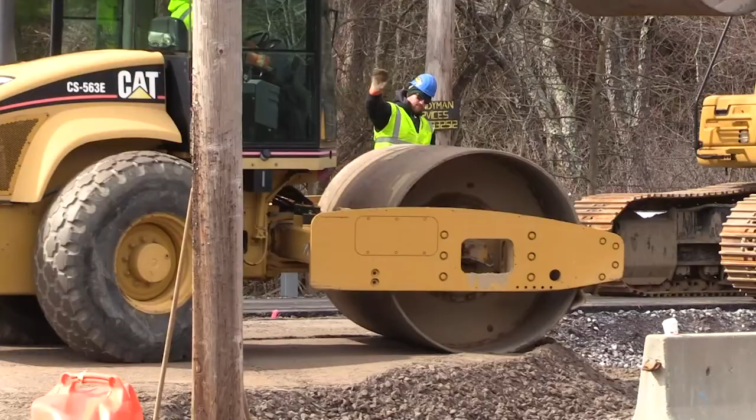Good morning, I'm Kyle Fox, Public Works Director for the town of Merrimack. Hi, I'm Diane Trippett, I'm the town clerk tax collector for the town of Merrimack. I'm Captain Matt Tarleton with the Merrimack, New Hampshire Police Department.

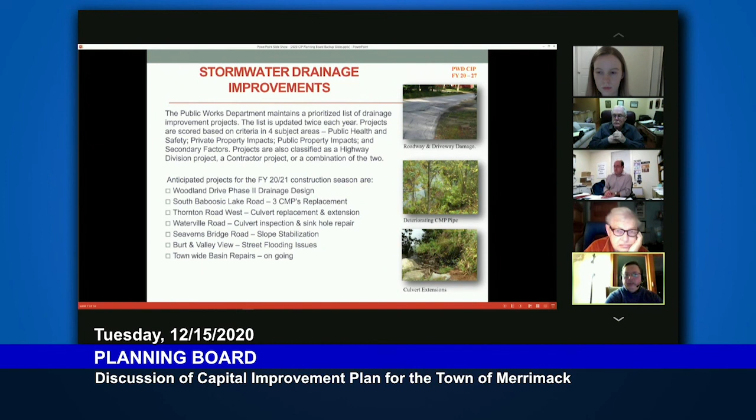Excellent, that was well explained. And I guess the overall objective of this is to protect the quality of the water in the Merrimack River and other surface waters where we may be draining water to. Exactly right. Does anybody have questions about stormwater drainage in this presentation? Thank you guys for the little primer on MS4. I think we get so used to hearing these things that we just race past them sometimes, and it doesn't hurt to give it a little bit of better explanation.

Paul, what's next? Something that's near and dear to the planning board's heart, some sidewalks. I saw this in there and I was cheering, I'm like, look at this, I can't wait to talk to Paul about this. We're going to applaud out loud when you get done explaining this one.

So right now, as you know, the council has set aside $200,000 in this current year budget. They approved the project on Woodbury Street, connecting the high school to DW Highway. Before it snowed, we had some surveying work done out there. So we're starting the plan to get that sidewalk in on Woodbury Street. We hopefully will have that during the next construction season, so spring, summer of 2021.

The town council has made a commitment for $200,000 in the sidewalk to expand sidewalks over the next several years. So next year we're looking at areas, and I believe we have 4 or 5 projects that we put on a plan for the town. We're looking at areas such as Brunswick Road, projects that we can complete and shore up some of the sidewalks. $200,000 does not go very far if you have to buy easements, move utility poles and things of that sort. So we're really looking for some low-hanging fruit to get this project done, but we really want visibility of the sidewalks in the center of town and around DW Highway. So that's what we're looking at in our sidewalk master plan moving forward.

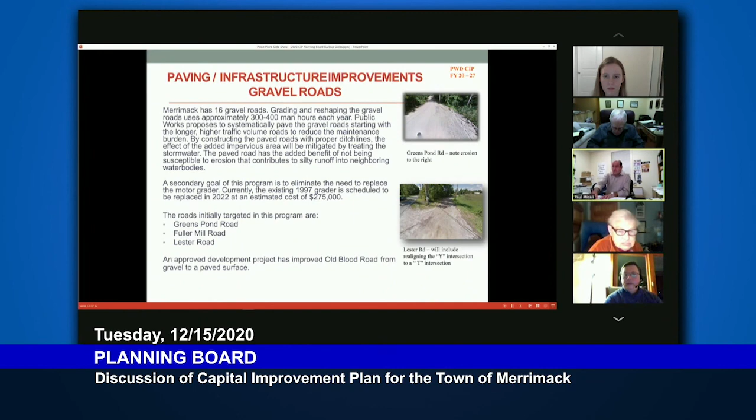Yes, the next one is one of our main ones, we talk about it all the time - DW Highway. We paved it a couple of years ago. It's approximately 4.9 miles, and we do it in sections. Last year we really took on an undertaking for some crack sealing and things of that sort.

We're looking at 23, 24, 25, 26 to go through, and instead of doing a major wear course on it, we're just hitting the areas where we feel we can rehabilitate that section of road before conditions get so bad that we have to do a full rehabilitation. This is all part of our infrastructure investment in our roads, and DW is one of the major thoroughfares through our town. So we're looking at things of that sort to keep the road in good shape so that it isn't as costly when we do go to repave it.

Okay, questions about that? Do you think this work will make the road good enough for when we have to face the inevitable increase in traffic while they do the Everett Turnpike?

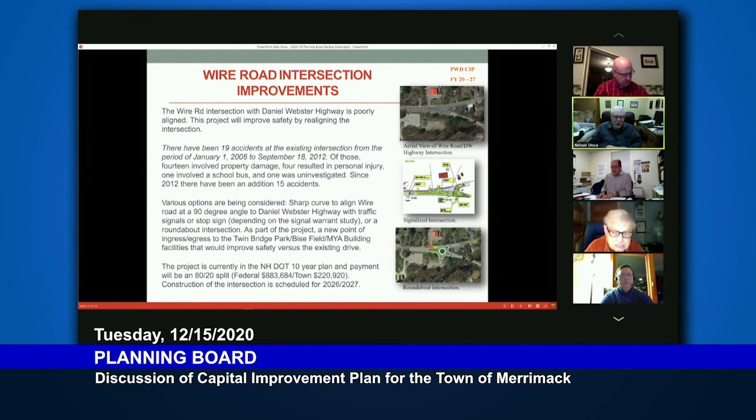Yeah, okay, that's what I was getting at. Thank you, Paul. Any other comments or questions about that one? Okay, no, let's go ahead then.

Turkey Hill Road intersection improvements. That's been before the council since September. I believe it's been through engineering and design, and Kyle's group is going to bring it back in front of the council, maybe January or February, to get final approval and go ahead, with a roundabout planned. They'll finalize some of the design and bring it forward for the council to see.

Hopefully construction is anticipated in 2021, spring or summer season, to do construction on that road. Thank you, Paul.

What's the cost estimate on that one? It's not shown on my spreadsheet. Yeah, the council had that in the budget last year, give me a sec. So the funds have already been allocated for this? Yes. Awesome. About $300,000 has been allocated for that realignment.

I think it was a little bit more, around 350 to 375 thousand that the council approved for that project. So, yeah, the funds— and if I can jump in, Paul. Yeah go ahead, Kyle, you're back. Yeah, I've been here.

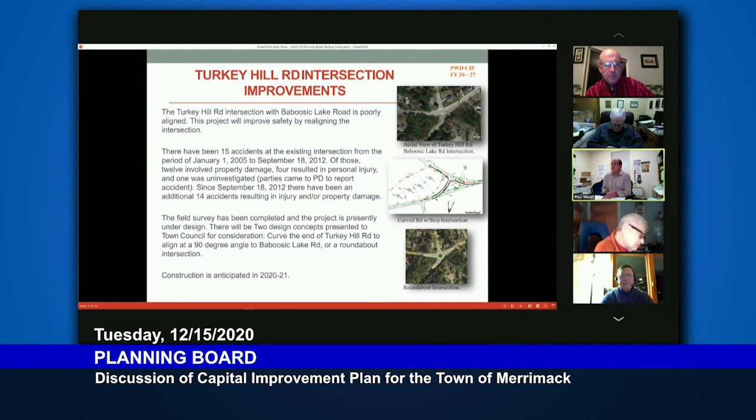Good point. Yes, anyway, thank you for the presentation on that. Any other comments on that one? Thank you, Kyle. Paul, lead us on.

All right, Merrimack River boat ramp access improvements. As you know, we own a parcel down by Thornton's Ferry off of Griffin Street where we have a boat access ramp. We also own another property that was conservation purchased. So we're looking at potentially improving the access to the Merrimack River for a boat launch.

The good thing is there's actually good and bad here. Fish and Game has money to help us with the project — that's the good part. Another good part is Nashua, near Greeley Park, has put in a boat launch as well onto the Merrimack, so bigger boats can launch down at Greeley Park.

The bad part is that to get to our boat ramp, you have to go underneath the railroad trestle, and that kind of limits the size of the boats and the size of the trucks that can get through there to drop off a boat. So those are things that the council is looking at. The other thing the council's looking at is that mostly every spring that road floods, so we got to look at building a road that is feasible and easily repaired, because we cannot get our heavy equipment down there to repair the roads. Once again, we got to get underneath that train trestle, and it's a very low train trestle from the B&M Railroad.

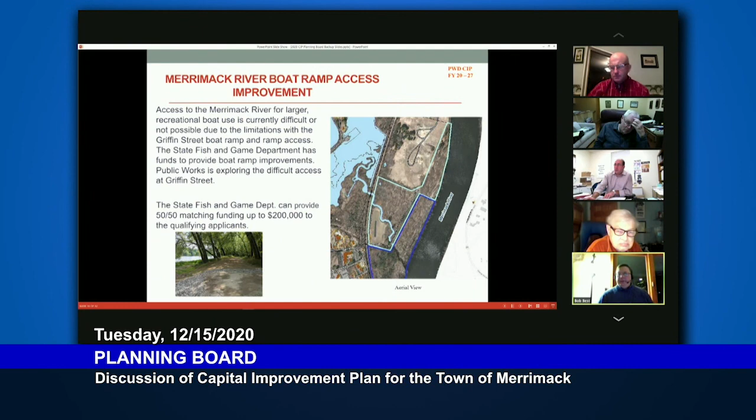I'm going to skip to the sidewalk improvement. Once again, we already talked about that, but we are looking at some TAP grants over the next every 2 years to help us in that process, as well as the council putting their $200,000. And what we also talked about, Bob, is the potential, if the council sees fit, of having that sidewalk fund, so to speak, to help with these projects.

That's what we're looking at with the TAP grants, and Nelson's very much involved in that TAP grant and issuing those TAP grants, helping us going forward. Don't I wish?

We're looking at a sewer extension project based on our master plan, in the McQuestion Mayflower area of town, up by where we just had the developer fix the sewer coming off O'Gara Drive, which will make this project a lot easier for the town to connect. We don't have to go up and around through that neighborhood that cuts through on McQuestion through Baboosic Lake Road there. This project will be able to connect into that sewer infrastructure that was replaced and repaired. So we're looking at that in the 22-23 year for some sewer improvements in that area.

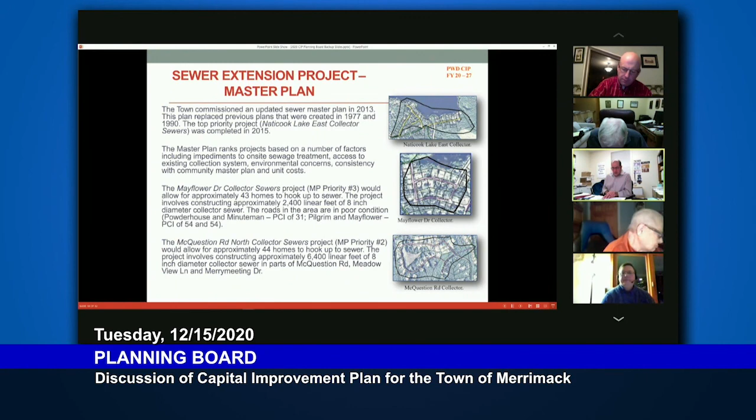The other one is Depot Street - Councilor Boyd hit on that about the canoe launch. It kind of came to the point where you can't really get anything in there because the launch is disintegrating or being washed away with some of the water and floods we had. So we're looking at doing some repairs to that this year in this construction season.

And then the next big one is a placeholder - this is a little bit out of line, but the stabilization of the bank at Seaverns Bridge on Amherst Road there. We need to stabilize that slope because the way it's going right now, it's washing into the river over there. So we're looking to get some stabilization done for that project.

There's an existing canoe launch, but there's potential to go across the road onto a property the conservation commission owns, to have a better area for a parking lot and canoe launch. But that's further down the road. This project is just to stabilize this banking, so number one, we don't lose the road, and number two, it's safe for people to put a canoe or kayak in the Souhegan River at that portion.

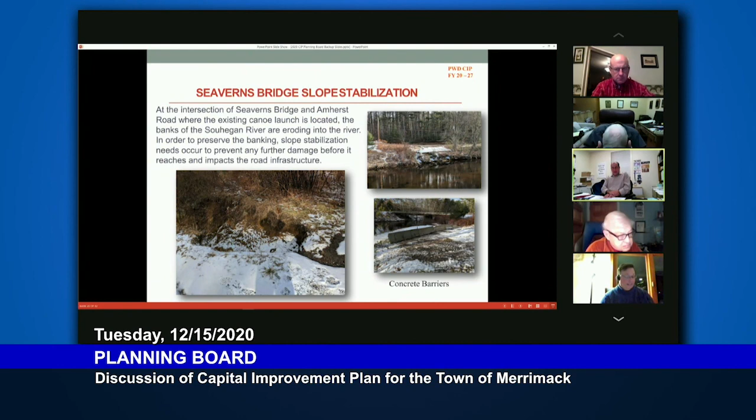This next one is near and dear to all your hearts on the planning board: the master plan, which is coming due in '24 and '25. And then the last item is athletic fields development, because of the need for athletic fields in this town—we're looking at several different opportunities for that.

I know I went through those things pretty quickly—a lot of placeholders, keeping things on the radar, so to speak, so they don't fall out of people's minds.

That makes sense. Many of these are so far out in the future that we've got plenty of time to talk about them, and any questions or answers we'd have at this point would be subject to change anyway. So I'm glad to have this brief discussion. But let me recognize—does anybody have any questions on any of the ones Paul raced through?

Nelson. Yeah, just one—there's one he skipped over completely, and I wanted to make everybody aware of it: the pedestrian bridge over the Souhegan River, the free bridge we got from Portsmouth that is now closed to foot traffic. Did you want to talk to that, Paul?

Actually, Nelson, you led me into my next slide—that's the next one I was going to talk about. Oh, I'm looking at the sequence on the charts. Yeah, I got a little out of order on my slides today, but yes, you're right, we got a pedestrian bridge from Portsmouth.

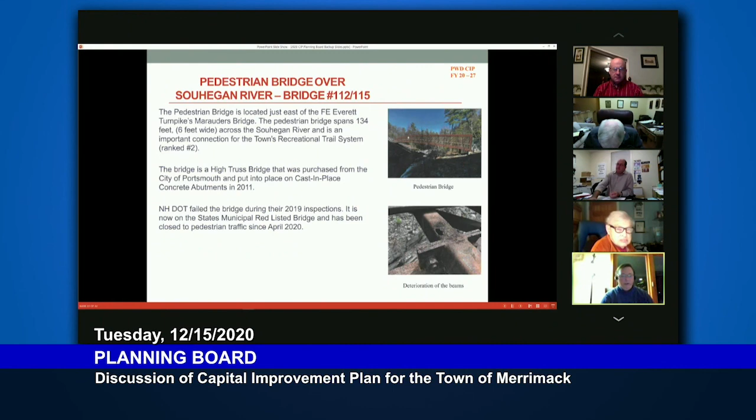All right, thank you for that explanation. Other comments or questions on the pedestrian bridge or any of the ones that Paul kind of sped through? If not, then Paul, with all haste, you could lead us through the sewer ones.

Since most of these are kind of the necessary infrastructure, I don't think that there's a lot of debate about the need for them, but let's hear a little bit about them.

So the first one is this relocation underneath the F.E. Everett Turnpike. Right now we're working with them, because as you know we've talked about the F.E. Everett widening project. As part of the project, they're replacing the concrete box culvert that carries Naticook Brook and our sewer pipe underneath the highway.

We're working with them on probably a relocation, and the gravity pipe will be eliminated along with maintenance requirements associated with the pump station. So we're looking at about a $500,000 cost, and that is going to be in coordination with when they get to that section of the F.E. Everett Turnpike to relocate our sewer pipe that comes underneath it, goes down towards our interceptor, and then comes back to our plant.

So we have to work with the state to coordinate on trying to do that, especially because right now I believe we're going through one of their culverts, and that's a no-no now. You can't put a sewer pipe through a culvert anymore, they have to be on their own. So that's one thing we're looking at with this relocation, in coordination with the turnpike.

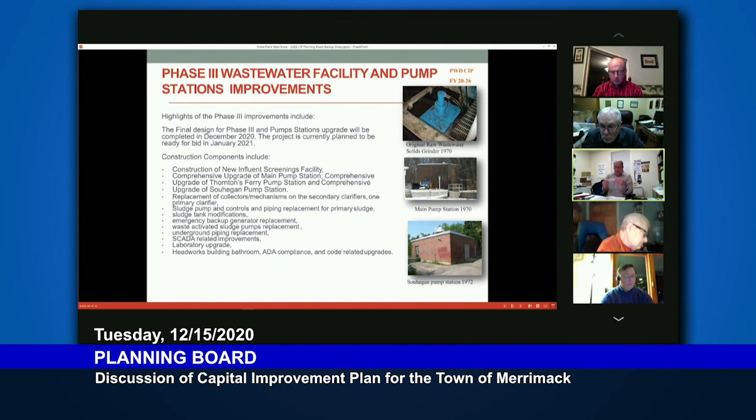There's the Pennichuck Pump Station, the Birch Street Pump Station, the Heron Cove Pump Station, and the Pearson Road Pump Station. We believe that over the next 3, 5, 7 years some of these projects are going to have to be taken up and rehabilitated.

One of the reasons why is that, as we talked about, some of these costs are not as extensive as replacing Thornton's Ferry or the other pump stations or the main pump station. Some of these are just getting newer equipment in there, things of that sort, correcting some of the issues that we have, making sure the piping is good.

One of the things is the Pearson Road Pump Station is 90% Bedford, so Bedford would be paying 90% of the upgrade there. These are just upgrades to pump stations that would come out of the operating budget or the capital reserve fund.

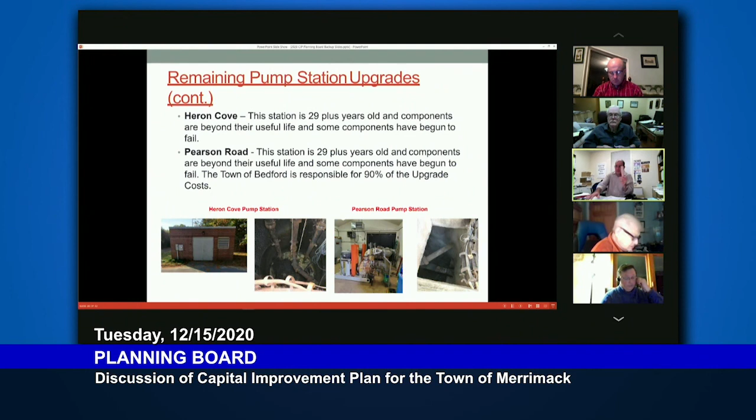For this, some of the other ones, there's a project where 6 pump stations would communicate with wastewater via radio. The 3 remaining pump stations communicate via cellular data plans. Basically this is tying in all the new equipment in these pump stations, this project is to tie them all in and be 100% computerized.

So if something goes down we are aware of it, we don't have to drive out to these pump stations and check them on a daily basis. This is something they can check via the computer at the wastewater treatment plant or on a smartphone if so be it.

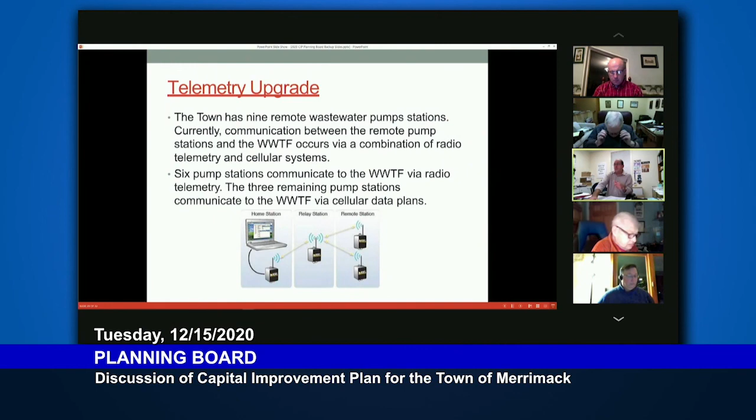So that's one of the projects, and that project we're looking to do in the 23-24 year. And then the other one is our SCADA system. We're looking to upgrade our SCADA system from Windows 7 to a proposed new system, Windows 10 or the latest version, when we go ahead and do that.

But we're looking to do that this year, so it'll probably be a Windows 10 system for our SCADA. And our SCADA system is basically the computer behind the controls of our wastewater treatment plant.

Excellent. The last item is nutrient removal, which is just a placeholder for out years. Kyle can probably explain this better, but it's something we need to address for our next permit. As designed, nutrient removal is required to protect against fertilization and organics. This is out there so far, but it's something we'll have to look at when we go for our next permit, so we want to put a placeholder in here to start thinking about the process.

You're exactly right, Paul, this is a placeholder. EPA and DES have both been talking about dropping the phosphorus limits in the Merrimack River substantially, to the point where we would have to add new infrastructure to increase our phosphorus removal from where we are today. So we're doing a lot of studying of the river, both upstream and downstream of our pipe, trying to make the case that it's not warranted, that what we're putting into the river is actually cleaner than what's already in the river. But this is a placeholder in case EPA ignores our arguments and says we need to do something anyway.

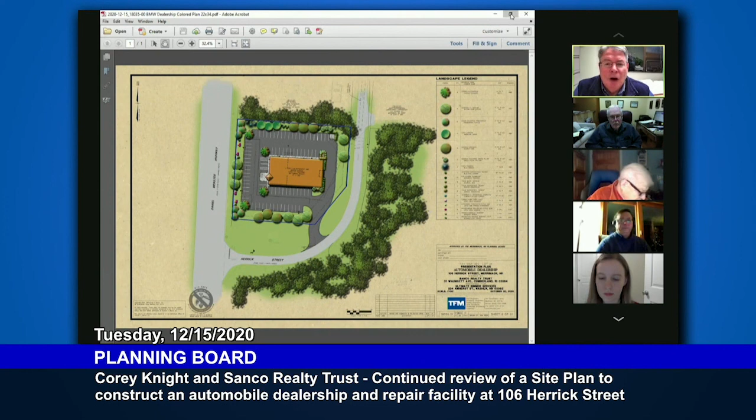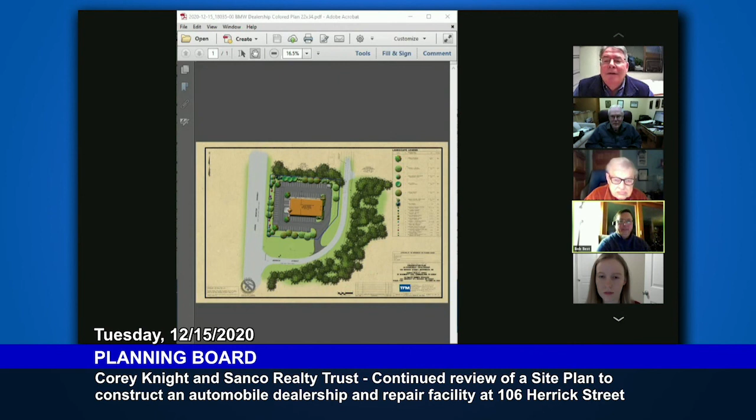Let's see. You there? I'm just trying to switch to the grading plan, sorry. I didn't know if I lost audio. Almost switched - so this shows the grading plan. Can everybody see that? No, mine still shows the rendering. Okay, alright, sorry about that. Let's see. Take your time, technology is... technology is our friend. Okay, that looks like - sorry, great about that. There we go, all right.

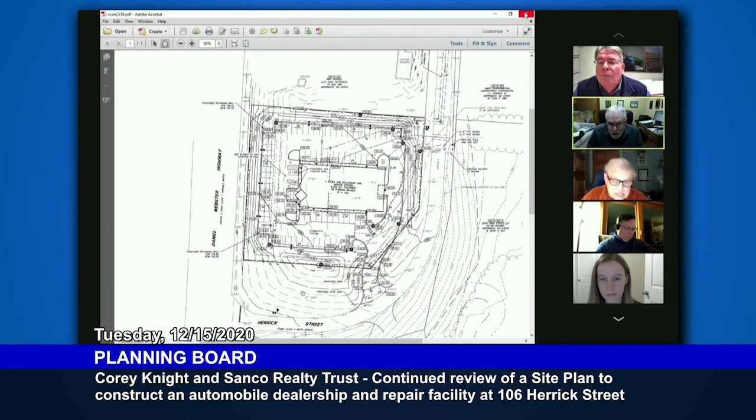Yeah, I'm talking landscape. The other thing I think we had asked for, I'm missing somehow, was some views of this from Route 3, how it appears when it's finished. I think we're going to be looking at the rooftop of this building, and what is that going to look like? I know there were some elevations in my package, but it'd be hard to tell what the view from the road would be, because the elevations are trying to show us the side of the building, not the view from the road.

Yeah, the side of the building, that's the one we saw last time. So if you're looking at it, we basically sit 10 or 12 feet below the roadway. You can see this would be the face - it's a single-story building, but they are accenting this front portion. So this would be what faces Daniel Webster Highway, and this would be the look of that building. Again, the road would be someplace about here, so from the roadway you'd be looking at the top portion of this building and the emblem that they have.

Yeah, I thought we'd be looking at air conditioning equipment and that sort of thing, rather than... Anything we have like that would be to the back and screened - you wouldn't be looking at that on the roof. You can see the back part of the building has a peaked roof. This whole back piece is peaked. But you wouldn't be looking at rooftop equipment.

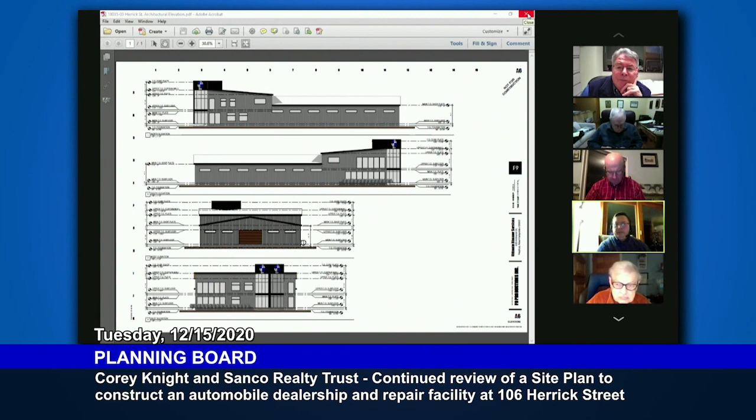So if there's no other questions by board members, the business that we've got to take before us is to consider the waivers, to take some public testimony, and then to consider some final action to the extent the board is prepared to do so. Would you like to take up the waivers, or would you like to hear any public testimony there may be, if there is any? Board members, a preference one way or another?

Let's hear from the abutters or from the concerned citizens. Sounds fine to me. Okay, so let's open up a public hearing and hear from any abutters or interested citizens.

If you are dialed in by telephone, press *9 on the telephone to raise your hand, and that would give an indication that we could call on you for your testimony.

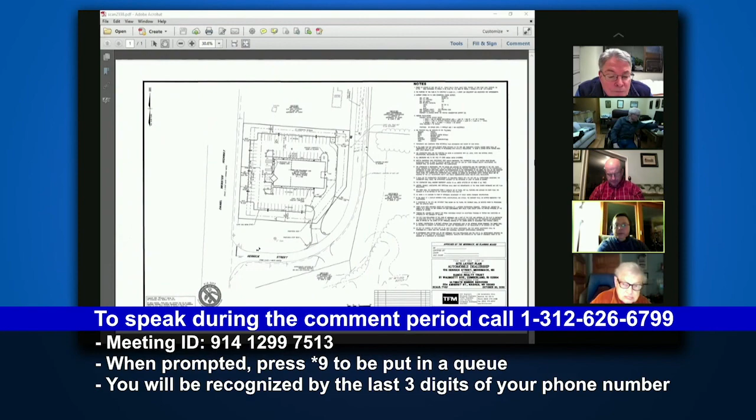So the soils are really nice on the property as far as infiltration capabilities. So that's what we're doing, we're capturing the runoff in our catch basins and bringing it over to the StormTech system. The chambers provide some storage, but the primary discharge is through infiltration. So we are mimicking the existing conditions as much as possible by infiltrating the majority of the runoff. Based on calculations, for significant storm events there would be some water that gets to this culvert and leaves the site, but we are matching pre- to post-conditions and not increasing runoff onto the neighbor's land.

Thanks, Jeff. So the StormTech system is an underground system of tanks or chambers that hold the water and then infiltrate it into the ground right underneath your parking lot where it was going before, or at least as close to where it was going before as you can get. Is that right? Yep, correct.

And Fuss and O'Neill, our peer review engineers, Casey, we've gotten our report back from them. Did they confirm the drainage calculations that the applicant has put forward? I can't confirm that, I don't have it right in front of me, but we do have it simply in our requirements, in our recommended conditions, that the applicant needs to meet any comments from Fuss and O'Neill, as a blanket statement. Thank you, Casey.

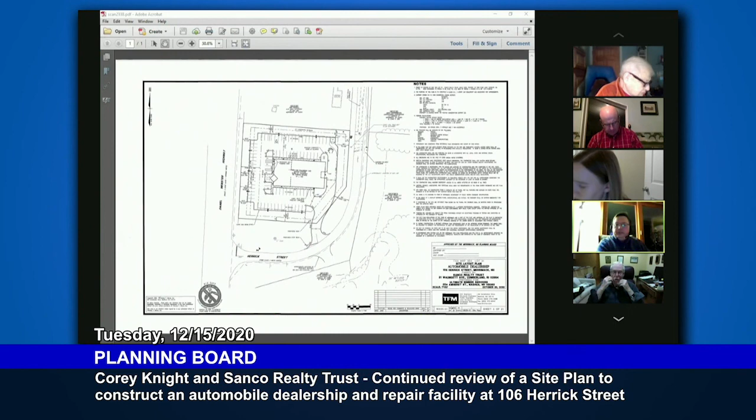Neil Anketel, how do you vote? I vote aye. Alistair Milnes, how do you vote? I vote aye. Bill Boyd? Boyd votes aye. Nelson Disco? Aye. Bob Best votes aye as well. That's 5-0-0 for conditional final approval.

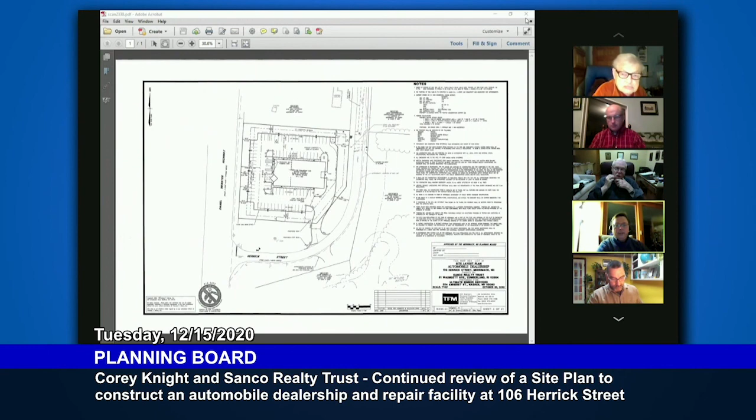Thank you guys very much. Welcome to town. I look forward to you being here. And it sounds like everybody agrees that you'll be a great addition to the community. That you're a good citizen of the community. Thank you very much.

All right, item 5 on our agenda is Eric and Jennifer Gould as the applicant and owners, and this is review for consideration of a conditional use permit to construct a detached accessory dwelling unit above an existing detached garage. The parcel is located at 12 Springfield Circle in the R1 Residential by Map District and Aquifer Conservation District. The property is tax map 4A lot 471.

Casey, is there anything that we need to know before we hear from the applicant? Not too much, just that this is an accessory dwelling unit proposal that's before the board because this is a detached unit. They were previously before the zoning board because their lot does not meet the acreage requirement to normally have a detached accessory dwelling unit. They did receive that variance, I believe, that was in October. So they're before the board tonight to get their conditional use permit.

Thank you, Casey. I think the other additional interesting bit to this is that the ADU is essentially going to be the second floor of a garage building that already exists. Exactly, yes. Thank you. Excellent.

Thank you. Okay, so Mr. and Mrs. Gould, please introduce yourself for the record, even though your address and your name are already on the record, name and address, and then tell us about what you're proposing.

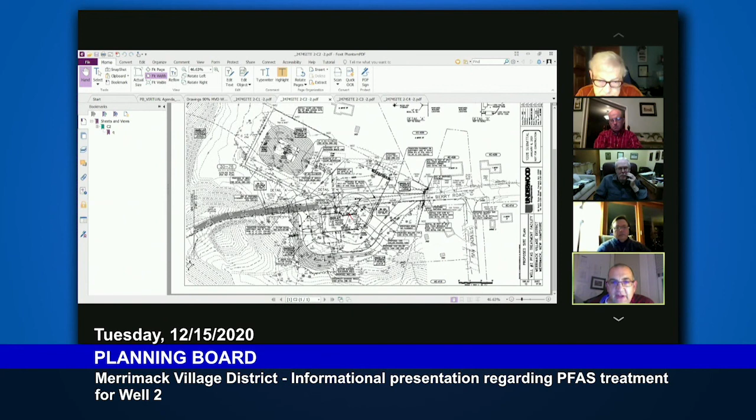And then on this site here, I'm just going to draw along the paved area. So that's going to come down around here and up around, and here's the treatment building right in here. We have to get a tanker truck able to drive around this facility - that's why it's a fairly large paved area around there.

The area up here is fairly flat, but it's a fairly steep road going down to the treatment plant, so I know we were talking about grades with the well 4-5 project. This point here is coming off of Berry Road, so it's going to be fairly flat in here.

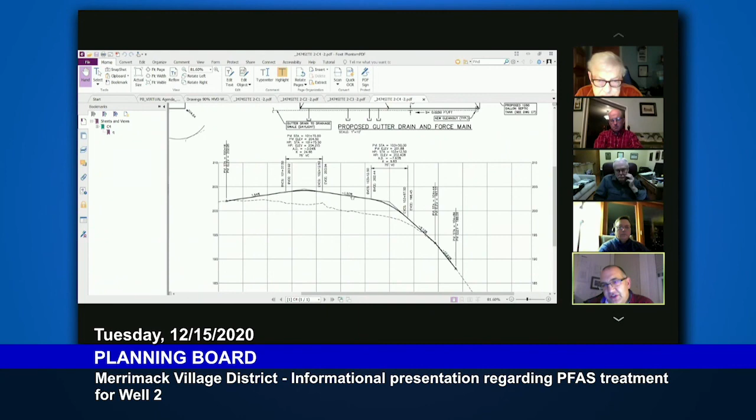I'm going to zoom in there a little bit. So we're going to be at like 1.5% grade in along the area. The building's going to be roughly in this area, and then it's going to slope off and go down the existing grade down to the well 2 building, which is down here. That whole hill is paved - that shaded area is the paved portion of the road.

So, okay, so we have that. And then, so that's the site. The building will look very similar to this.

So we'll have an upper portion here where the vessels will be located.

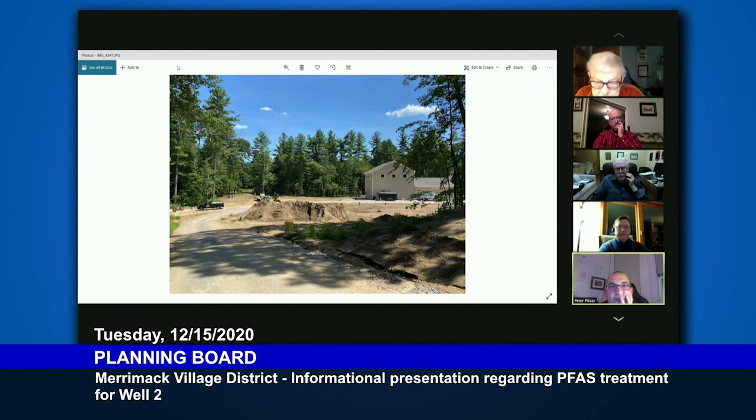So you have this upper portion of the building, this is where the vessels are located. And then you have the lower portion of the building where your chemical feed is. You have your bathroom, you have the workroom, and you have mechanical and electrical room, all in the lower portion of the room.

So this building will be set up similar to, so if you're looking at the site going in the right direction, the right side of the gable end will be facing Berry Lane as you come in. So that's the portion you'll be seeing. The building's going to look very similar.

Instead of doing 3 windows up high, we're going to do 2 larger windows, because it helps out with a structural issue since you need to have shear walls in your design. A shear wall needs to go from the top of the wall down to the bottom, and with all these windows, it cuts off those areas, making it tougher to fit a shear wall in. So that's why we're going with 2 windows, but it will look very similar to that.

Is that the building for the 7 and 8 well? Nope, that's 4-5, that's up one down on Front Street.

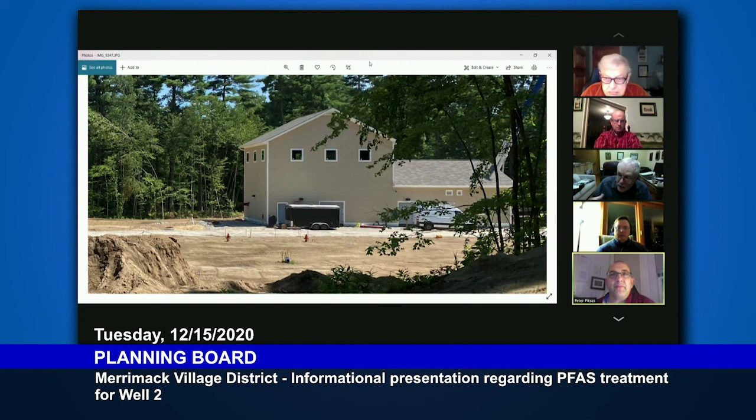Nelson, question: how will this look from there, residences already on Berry Lane, right? Can they see this, actually see it? What will it look like from their point of view?

Yeah, so let me show you a picture of the, let me get back to my PDFs. Where are my PDFs? There we go. Are you seeing that now? Yep, okay.

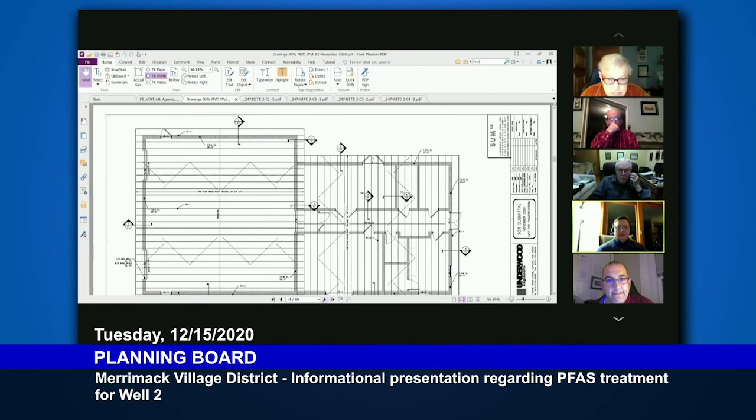The one thing that we are going to be doing on this right now, on the side here, the gable end, the overhang is only shown at about 8 inches, and we're actually extending that out to 24 inches, and that's what we had on the 4-5 plan. So that's the only thing different looking into 4-5.

So yeah, that'll look a little bit nicer. I think that's what people out there will be interested in or upset about.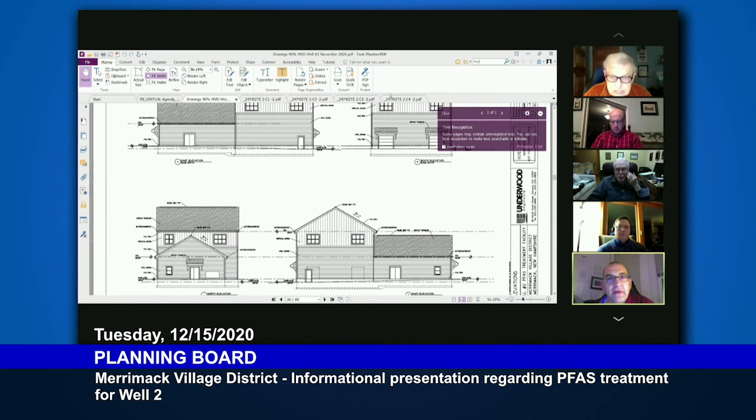And then just to let you know, over in here, I'll go back to the existing site plan. Oh, well, I don't have the existing site plan up, I just zoomed out of it.

Over in here, this person here, yeah, they ended up doing some clearing, and you can actually see this is the existing clearing line right here that I'm drawing on. So they actually, by accident, when they were doing some clearing, cleared onto the district's property. So for these people, there's really going to be no shade between them and the building because they cleared everything in between there. If they did not do that, we have an area in here that we could have left some shade, but they ended up taking it out. So they'll be looking right at the building.

This person right here at the corner of Stevens, we are going to be trying to leave some shade in here, and there is some lower growth stuff in there, so that will help shade them from seeing it. Excellent. Other comments or questions?

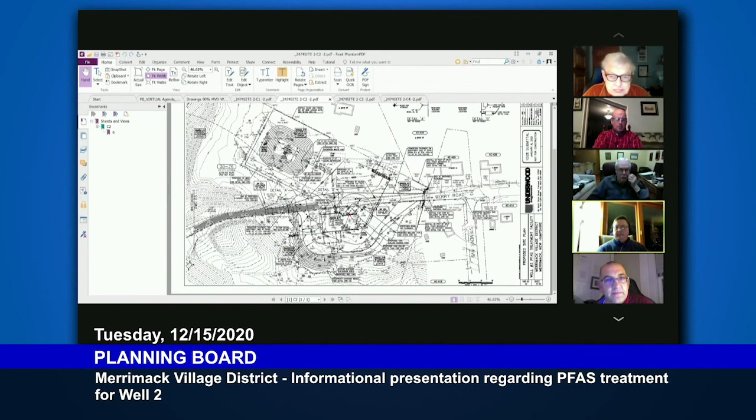No, no. Well, Peter, thank you so much for the patience. Oh, wait, Bill, you got a comment?

Bryce Drive, is there going to be a buffer for the two houses that are on Bryce Drive that you abut? No, because they cleared everything. They went onto district property and cleared any trees that we could have left for buffer.

Oh, that house you're pointing to is one of the ones on Bryce Drive? Yeah, so the homeowner themselves already cleared the screening and went onto your property and cleared some of your trees. They went onto the property and actually buried stumps on the district property too, so we had them dig those up and removed those out of there.

So there's no way to avoid it, and actually on that side there are a lot of tall pines with very little undergrowth. So they are going to see it, but the district has been in contact with them because of the clearing and the buried stumps, and explained the project to them. That one homeowner who's closest to it is aware of everything and does not have any issues.

Yeah, okay, fair enough. Yeah.

And by the way, Peter, I really appreciate what Underwood has done since this community has been exposed to PFAS for the last couple of years, and some of the designs that you've done with the wells, helping MVD.